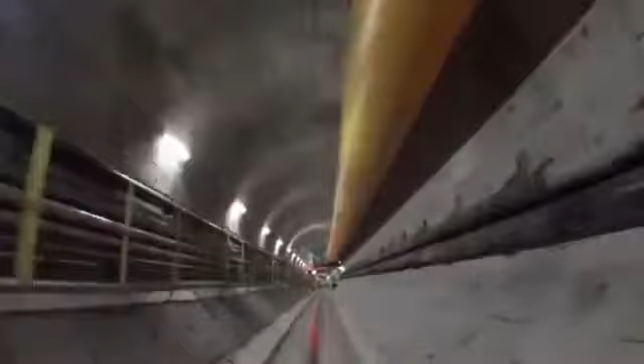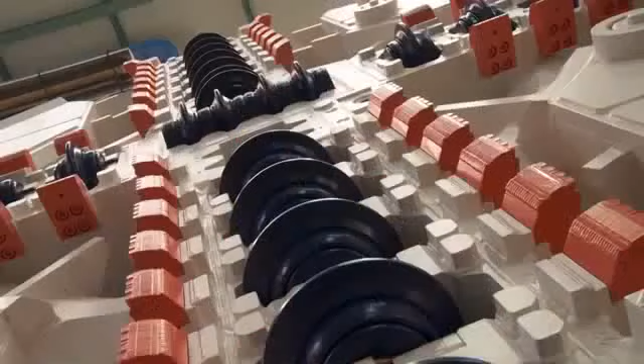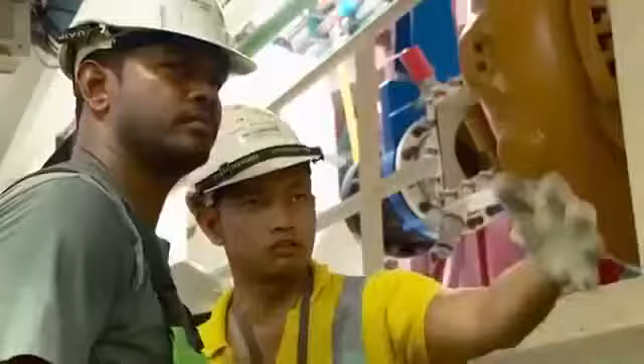10 tunnel boring machines will excavate through rock and soil to build the tunnel walls. 6 machines are designed specially for Kuala Lumpur's challenging geological conditions. You can say it's very special because no machine has been designed like this before. Rise to the challenge.

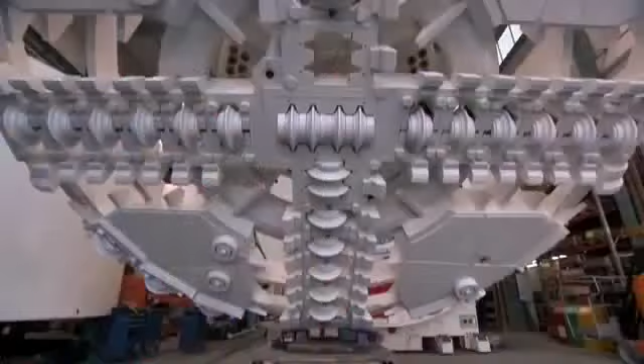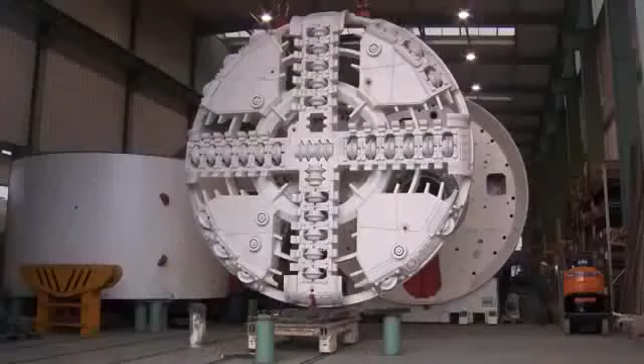10 machines are used. Tunnel boring machines are essentially cutting tools for the ground. You can refer to them as a mole. Most cities now, for railway, the tunnels are built using TBMs because of safety issues and because of ground conditions.

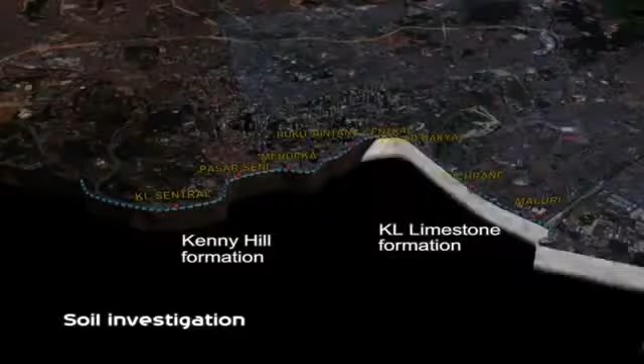Overall, the ground conditions along the Sungai Buloh Kajang Line underground section consist of the Kenny Hill Formation and the Kuala Lumpur Limestone Formation. The Kenny Hill Formation actually consists of weathered sandstone or mudstone. So it is very predictable and the profile is very consistent. For this section, 4 conventional earth pressure balanced TBMs are used.

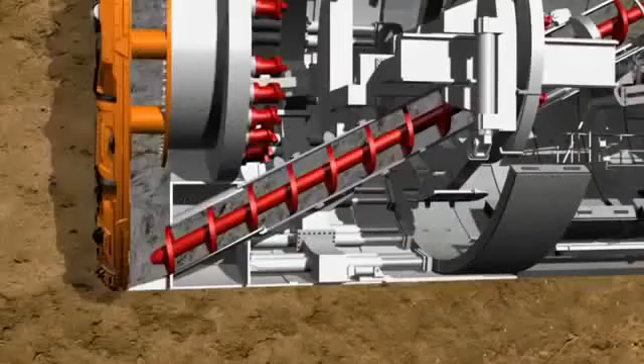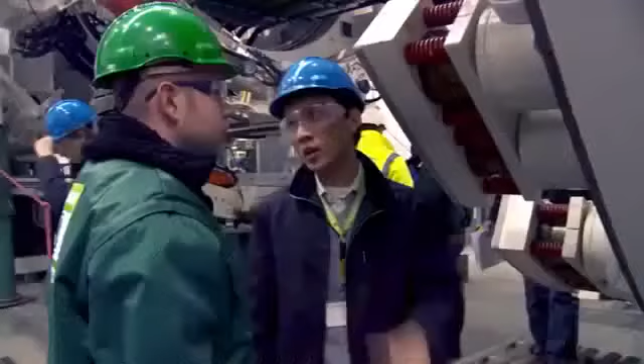KL Karstic Limestone Formation is one of the most difficult ground conditions for tunneling. So from the experience that we learned from SMART, we sent our team to Germany to work with our supplier to develop a machine capable of handling this type of situation, which is now known as the variable density TBM, and it is the first of its kind in the world.

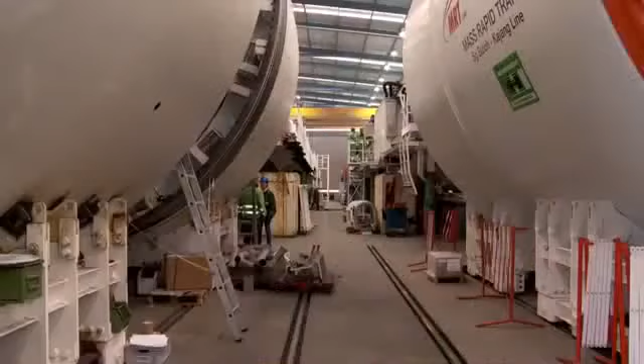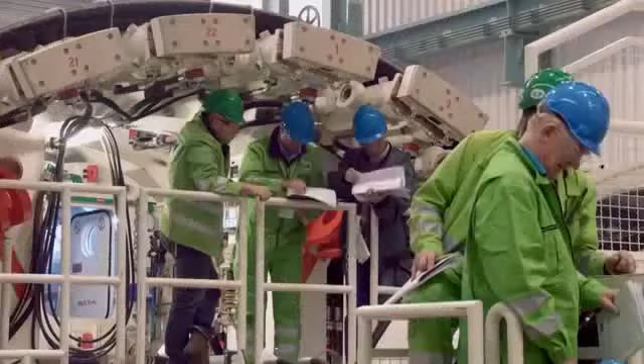The new machine, called the Variable Density TBM, was a result of a combined initiative by Malaysian tunneling experts from MMC Gamuda and Herrenknecht of Germany. It's a product of ideas, opinions and experience from all quarters. It's a very comprehensive machine. You can say it's very special because no machine has been designed like this before.

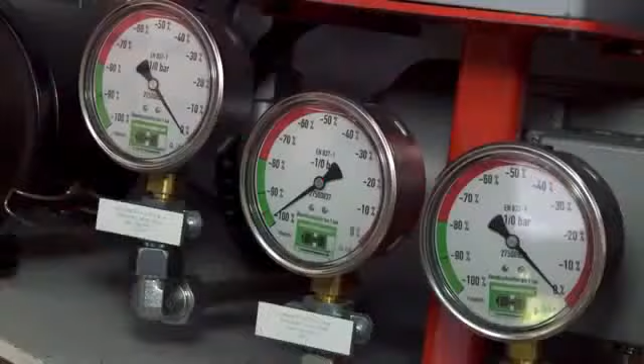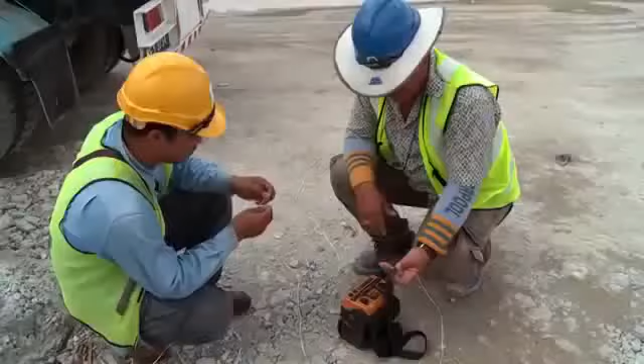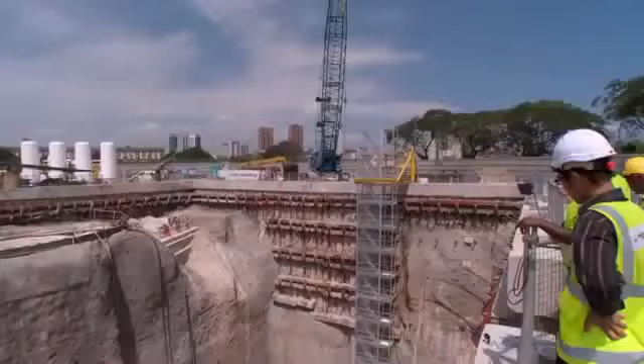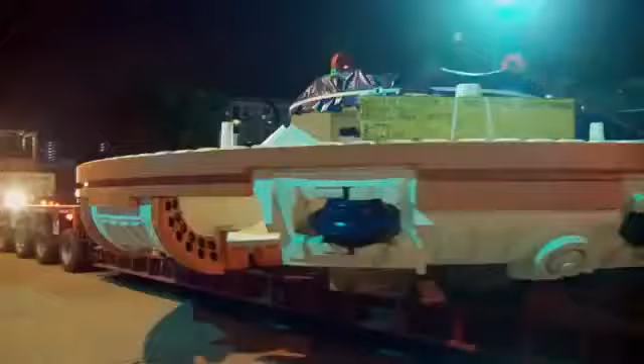The first variable density TBM arrived in Malaysia in late January 2013. Transporting the TBMs to the sites through Kuala Lumpur was a challenge that needed detailed coordination. Precise planning was required for the assembly of the machine, as any damage would require custom repairs in Germany.

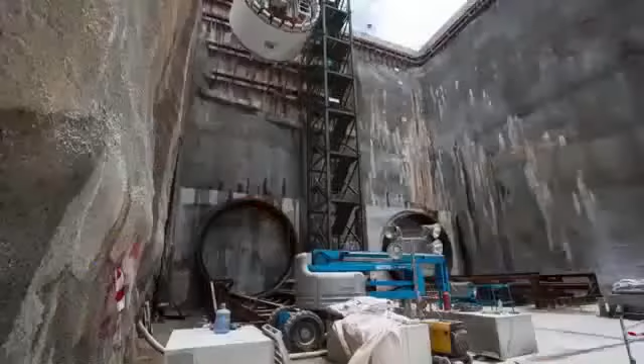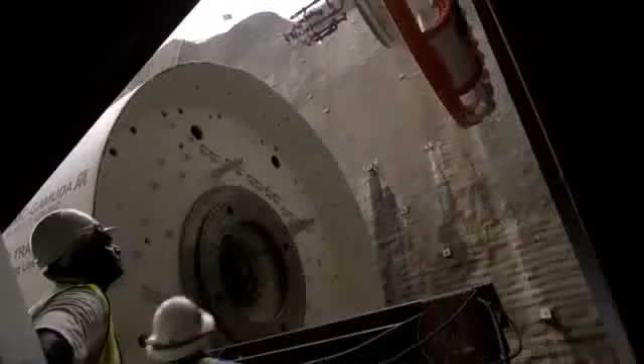This is a very complicated machine. And we are also dealing with very delicate components, very heavy, looks very tough but very delicate. We cannot afford to damage it. If the extent of damage is huge, then the impact to the project will be tremendous.

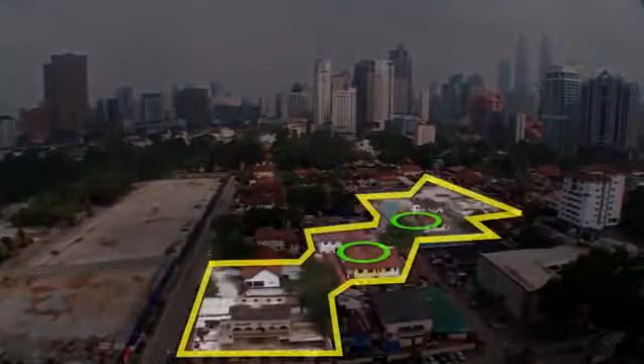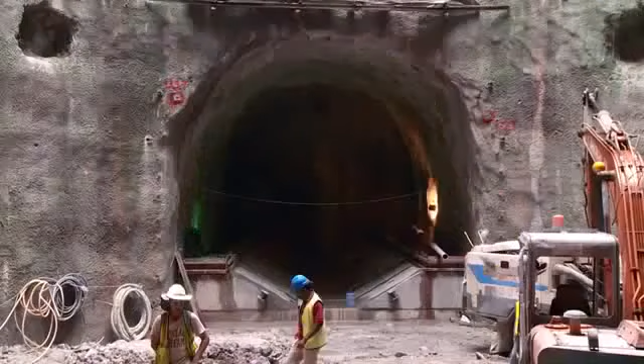At the Inai shaft, 2 variable density TBMs have been launched. The circular shaft was excavated to a depth of 34 meters. At the bottom of the shaft, chambers were dug to allow for the assembly of the TBM. Due to the tight space conditions, lowering the parts of the TBM was extremely challenging, especially the screw conveyor.

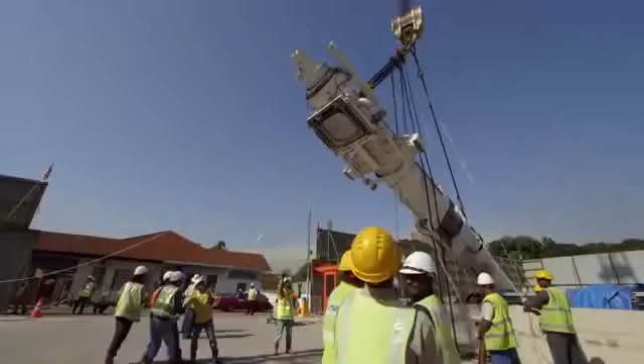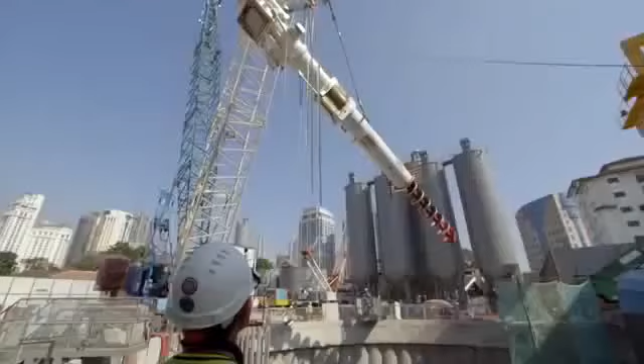It's the most difficult one because this length is actually bigger than the shaft itself. It's 18 meters long. The shaft is 17 meters. Any damages caused to this component would cause a major setback to the project and definitely to our launching.

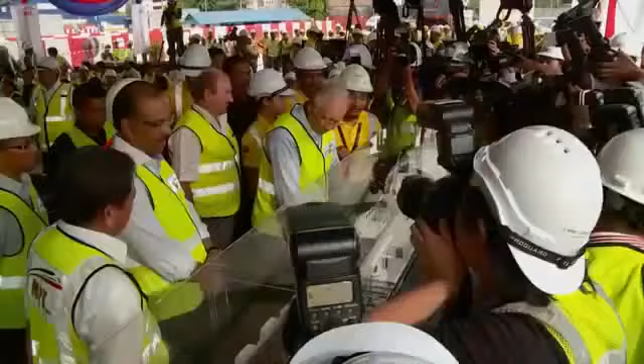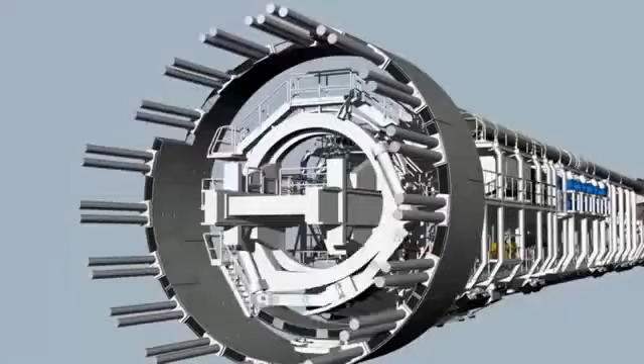The launch of the first variable density TBM was officiated by the Prime Minister of Malaysia, Datuk Sri Najib Tun Razak, on 30th May 2013. Each ring consists of 7 segments and 1 keystone. Segments weigh up to 2.2 metric tons and are lifted by a vacuum system.

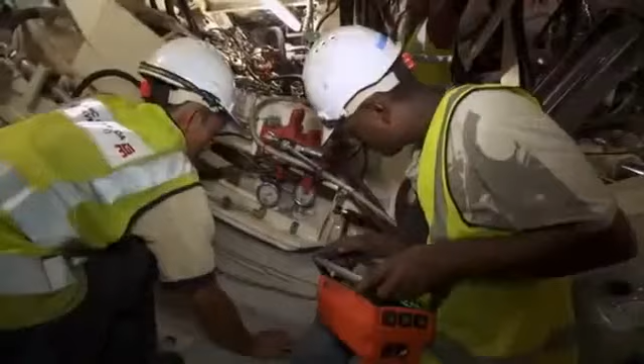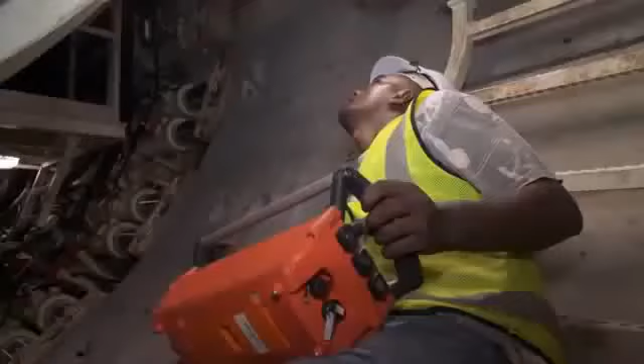The ring builder controls the giant hydraulic arms of the erector to position the segments down to millimeter precision. A total of 11,500 rings are needed to line the dual 9.5-kilometer tunnels.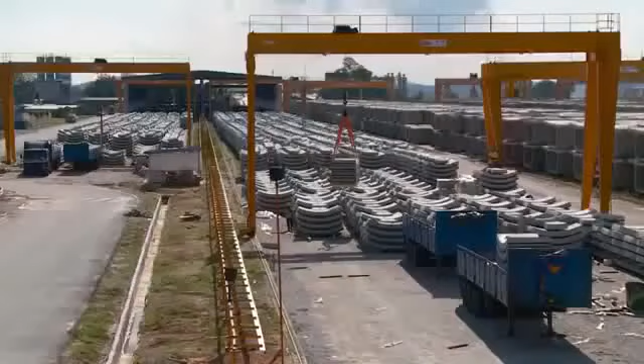Tunnel walls need to be strong enough to withstand extreme pressure and chemical attacks from the ground and water, and to also endure settlement caused by poor ground conditions. The tunnel segments are manufactured off-site at 3 different factories.

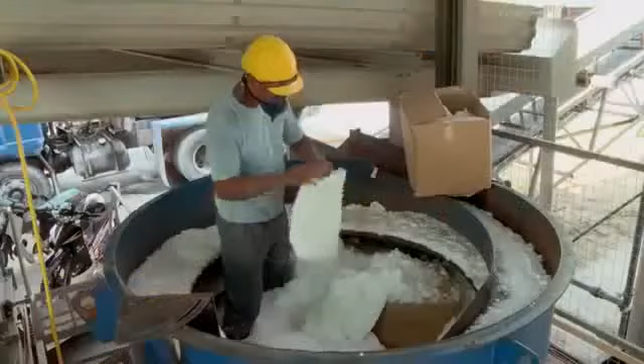We are adopting the technology we call steel fiber reinforced concrete. We use a staple-like steel fiber to replace conventional thick and heavy rebar. On top of that, we are using another fiber called polypropylene fiber to improve the fire-resistant properties of our segments.

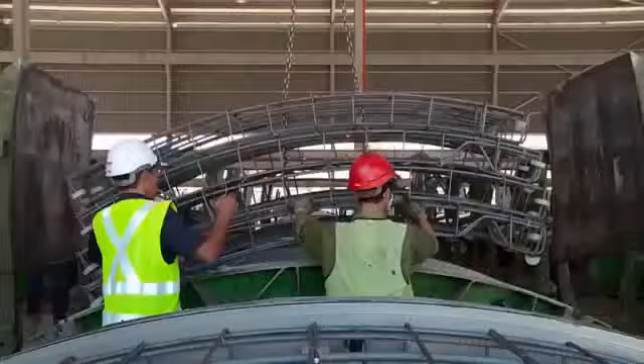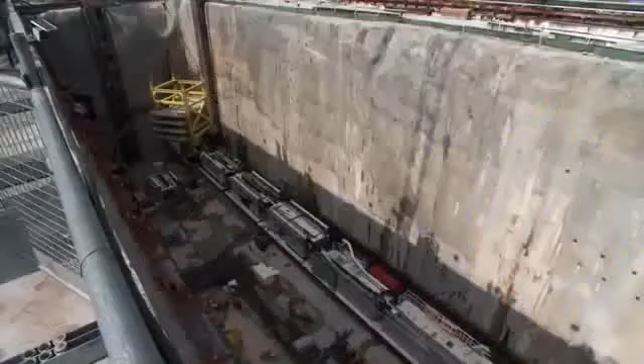At certain stretches of the tunnel where reinforcement is required, segments which can withstand extra load were designed. What you can see here is the hybrid system. When I say hybrid system, it means we'll have this rebar in, and at the same time, we'll pour in steel fiber reinforced concrete to cater to special geological conditions like crossing Sungai Kerayong or for the SMART tunnel. The segments are transported to the TBM using multi-service vehicles.

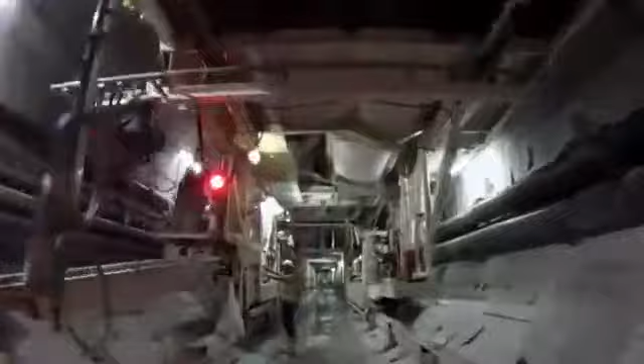As the TBM mines deeper into the ground, the temperature and humidity rise further. Giant fans pump cool air into the ventilation duct that stretches all the way to the TBM. The tunnel is like a giant artery feeding the men and machine with vital supplies: cool air, power, water, grout, and a crucial material, bentonite slurry.

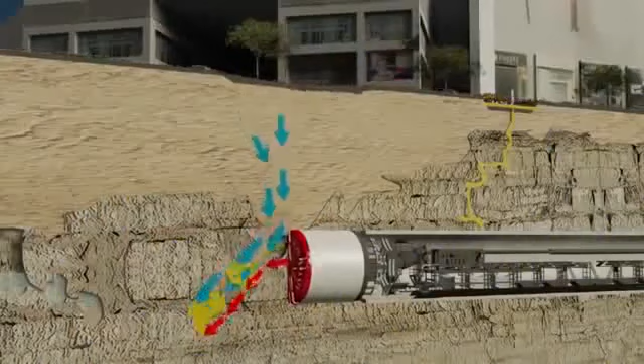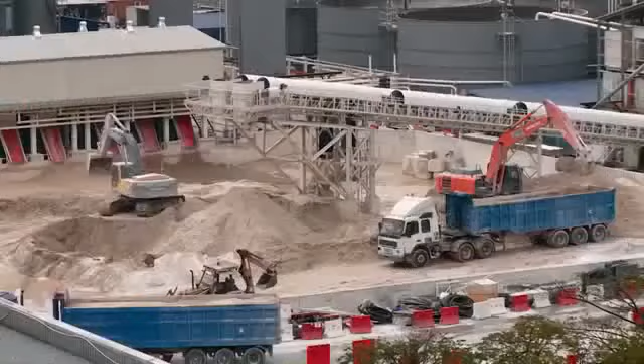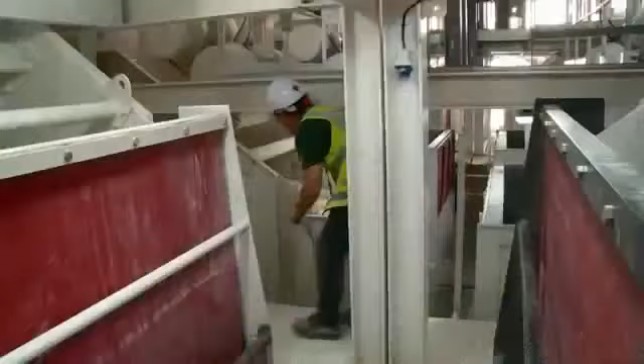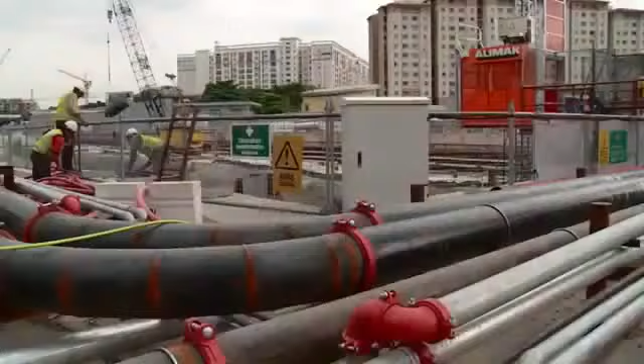Above the ground, a massive slurry plant is working around the clock to process and clean the slurry coming from the TBM through a series of screens. What the separation plant has to do is to ensure that the screens are all working perfectly, there is no clogging in the screens, and to make sure that all the conditions of the motors and also the screens are in 100% good condition. The cleaned recycled slurry is then piped back underground via giant pumps to the TBM to start its journey all over again.

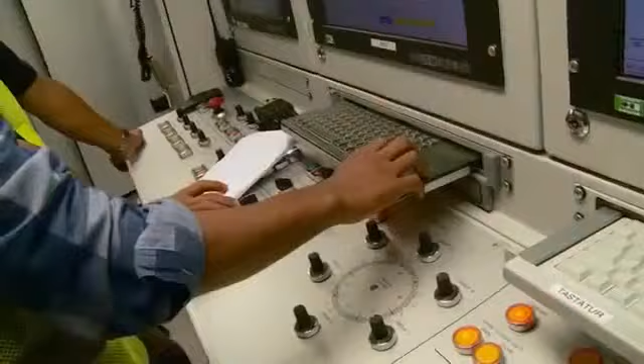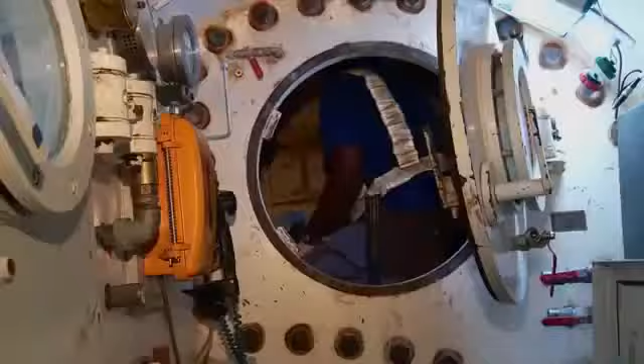After mining for a certain distance, the TBMs need to stop for servicing and maintenance, and this is called an intervention. We're having this intervention stop to have a check on the cutter discs. Cutter discs are like the knives of the machine that cut through the ground. So we're just going to check whether we need to change them or not so that we can further mine. The cutter head lies in the forward pressure zone. Before any work can be carried out, tunnel engineers first need to determine whether the ground conditions in front of the cutter head are safe.

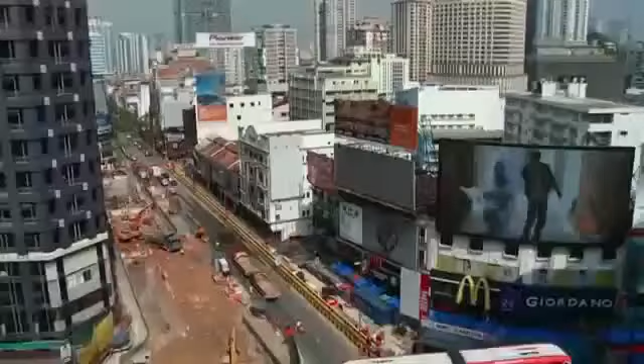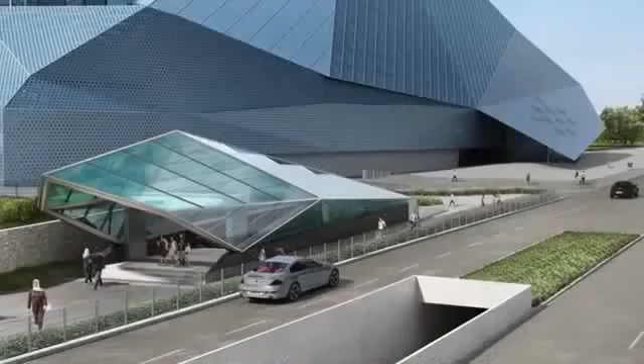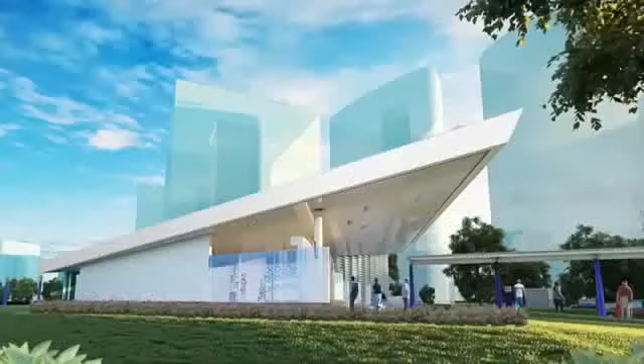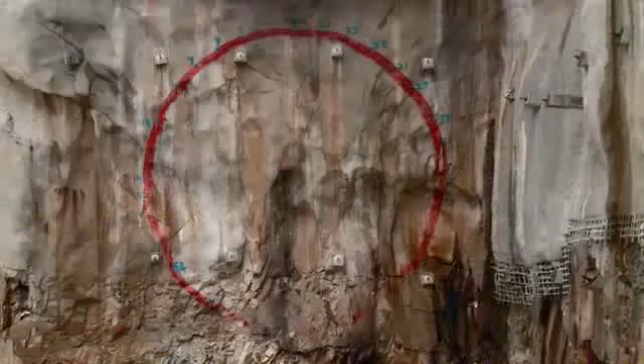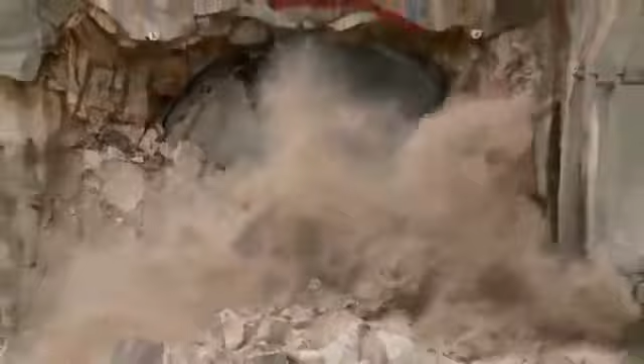On 24th April 2014, the underground team celebrated their 5th TBM breakthrough, accomplishing more than 50% of the underground works. If you look at the progress so far, it's been extremely encouraging. And my congratulations to Gamuda for working with Herrenknecht to actually come up with this TBM. And I think with the breakthroughs that we've been having, it's been worth their while, and it's really paying off. We've brought the underground work to a very good pace, and it's testimony to all the hard work that's been put in by the team.

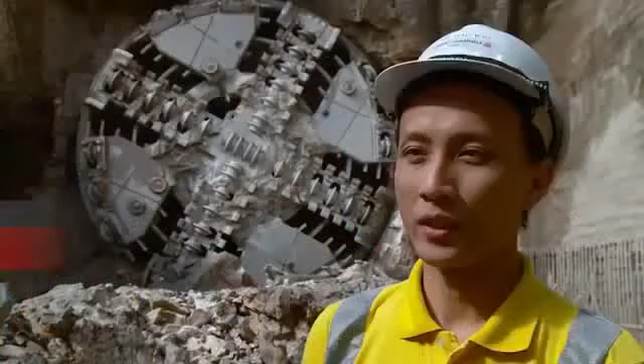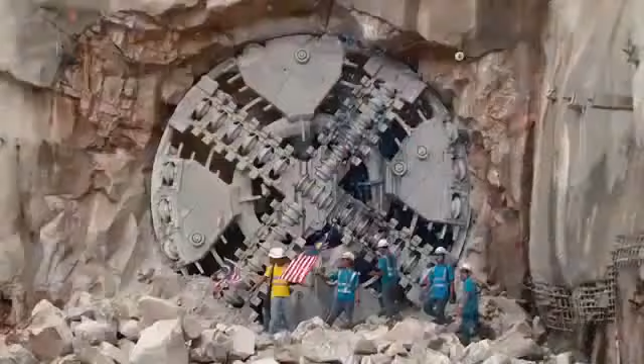It has been a tremendous, unforgettable journey. The machine has performed very well. So, a combination of machine equipment and good people, our engineering crew, our operation crew, the academy boys, and our young graduate engineers that have performed beyond par. It is an incredible achievement, not only for me, but for the